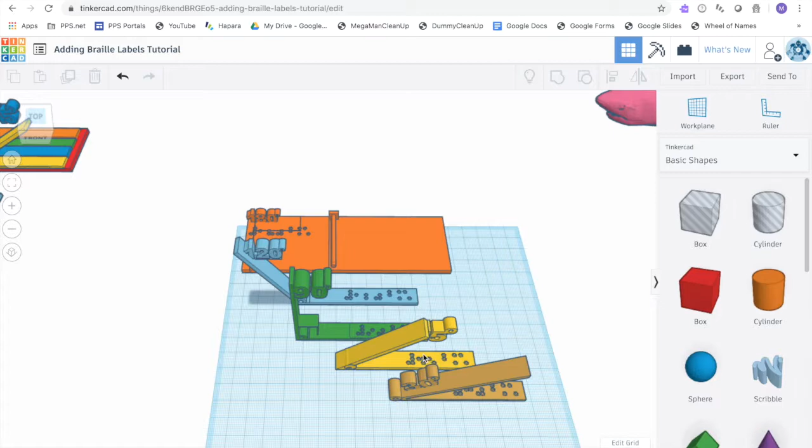So now that we're finished placing the Braille labels on this model, let's take a look at something a little more complicated. I'm going to grab all of these models and just drag them off to the side. And I've prepared this shark model with some Braille labels.

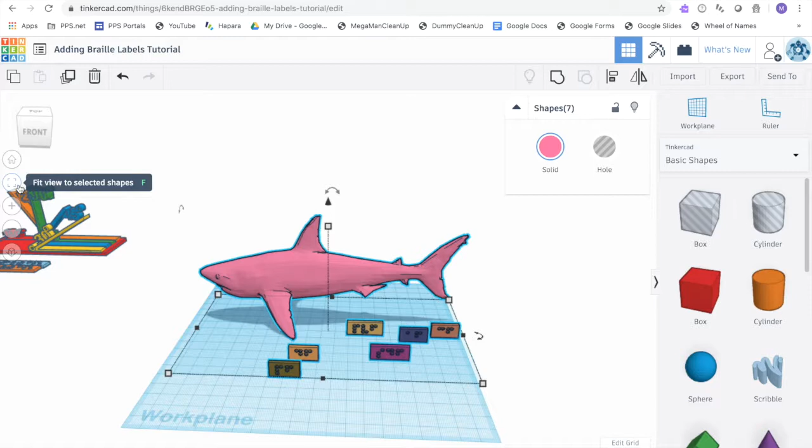You may have noticed that I used this kind of square tool over here. Fit view to selected shape is very helpful. If you have a single shape selected, you can quickly jump in to look at that shape closely, and it helps when you're editing.

Jumping back out, you can see that I have a shark model here, and I have a series of Braille labels. These are 2 and 3 character labels. The Braille takes up a lot of space on the model, so instead of using an entire spelled out word here, we're going to have to abbreviate everything.

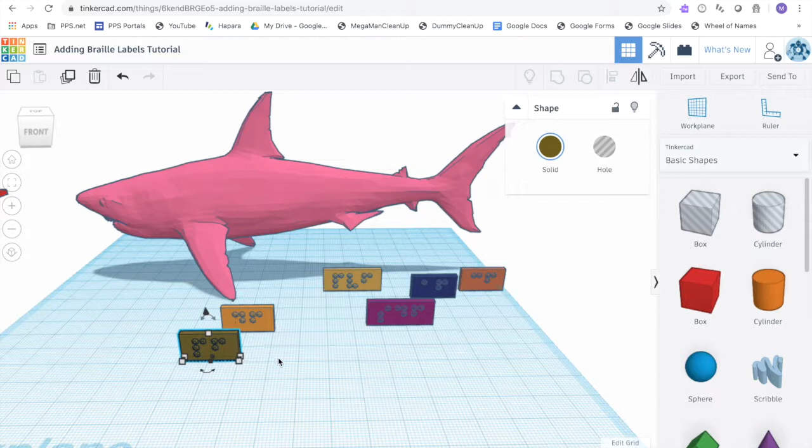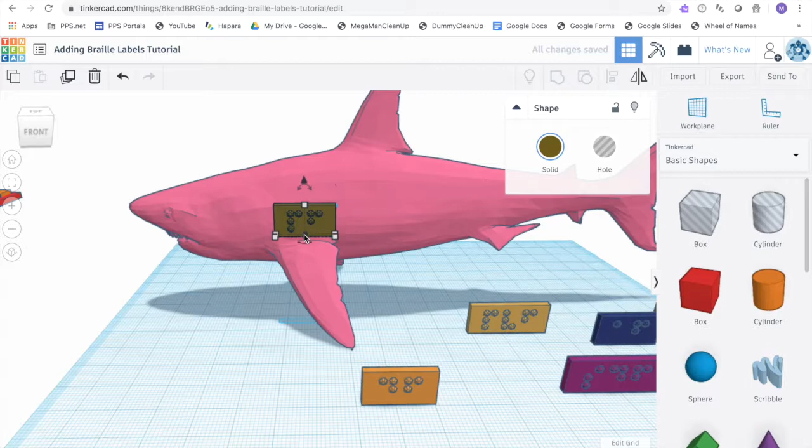So, placing these, I'm just going to try and eyeball this. This model isn't flat like the last models we were working on, so I'm not going to try and hide these surfaces, these kind of plates that the labels are on. I'm going to leave those in and have that be a nice boundary to help identify the Braille label and hopefully make it more readable.

So I've just placed it on the side there. You can see I'm leaving the plate intact. I want to move it in just a little bit more, so here I'm going to edit the snap grid.

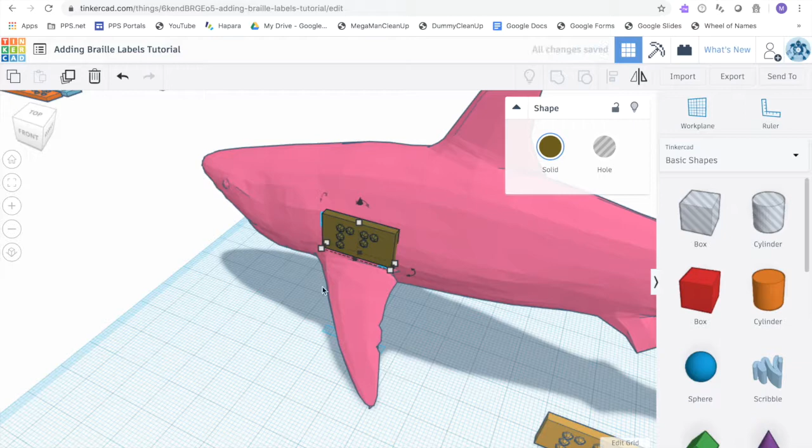And I just like to use the arrow keys. I don't want any of that pink to show through, but just enough that that label is kind of in there nicely, and it won't be hanging off too much.

Okay, and I'm just going to repeat this process with some of the other fins here. So I'm just dragging this over. I'm going to raise it up. It's not showing quite as much as I want.

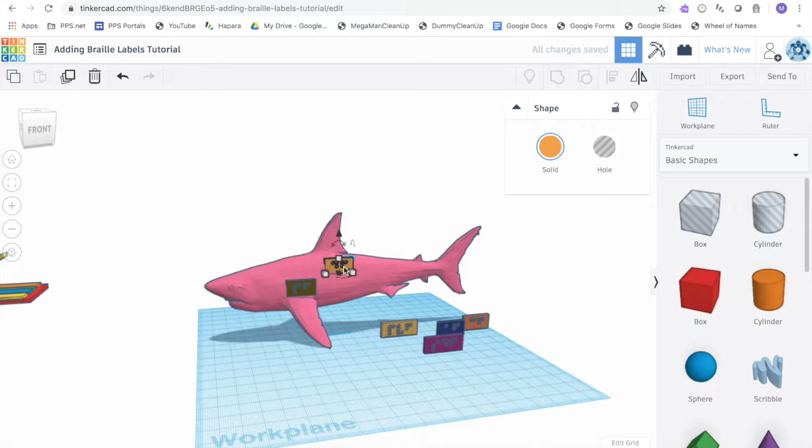Here I've set the snap grid at quite a small increment, but I didn't want to have to press the arrow key a whole bunch of times. So if you hold the shift key, it will move by that increment in a multiple of 10. So I don't want to have to press over and over again to move that. I can go ahead and hold the shift key.

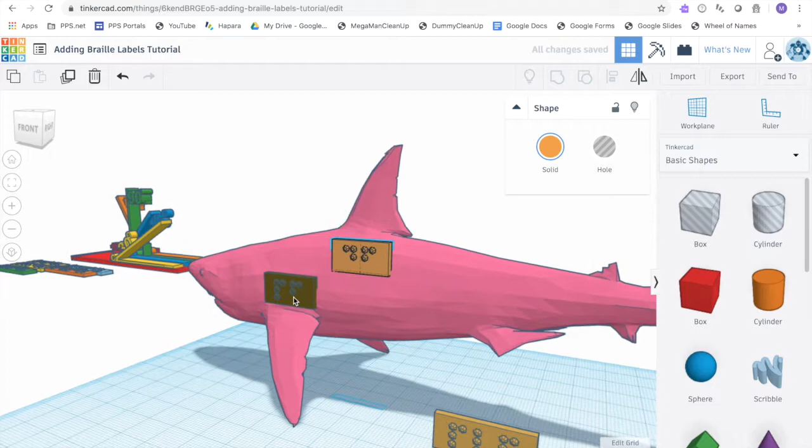Okay, that's an okay placement with that. I might actually rotate this a little bit. And if I pull it outside the circle, I get to more finely tune the rotation. I'm just kind of eyeballing this.

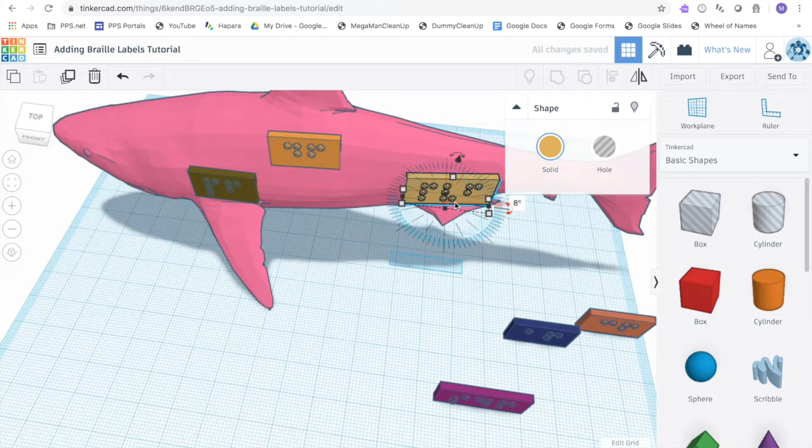Another option would be to use the workplane tool to really line this up. But in my mind right now, it seems easier to just look at this and drag the labels on that way.

So I'm keeping the label just adjacent to what they're labeling, as I don't want to obscure the item I'm labeling. Okay, looking at this one, this might actually be difficult to read because this fin sticks out here.

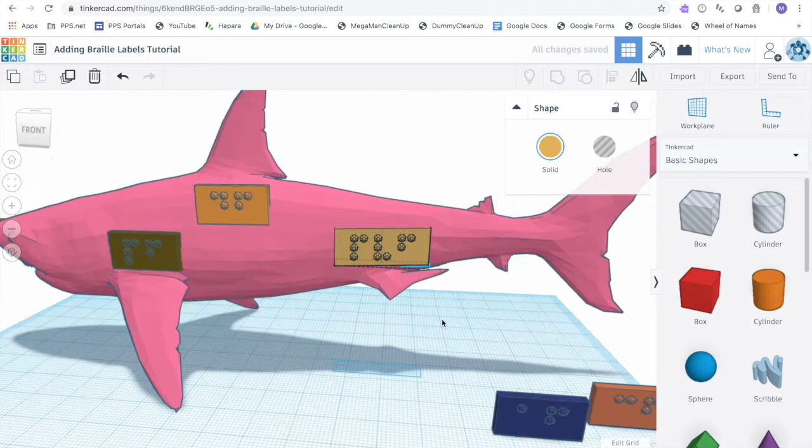I'm going to nudge that over. And you can see the pink through it, so I'm going to have to pull that back out a bit. That looks like it might work a little better.

This second dorsal fin labeling the top one here, I might put that along the top. And I'm going to go ahead and rotate this so that it's lying flat. I think that might help distinguish it from the other labels a little better.

So I did 90 there and I did not rotate the right way, so I'm going to do -90. I'm going to put this along the top here.

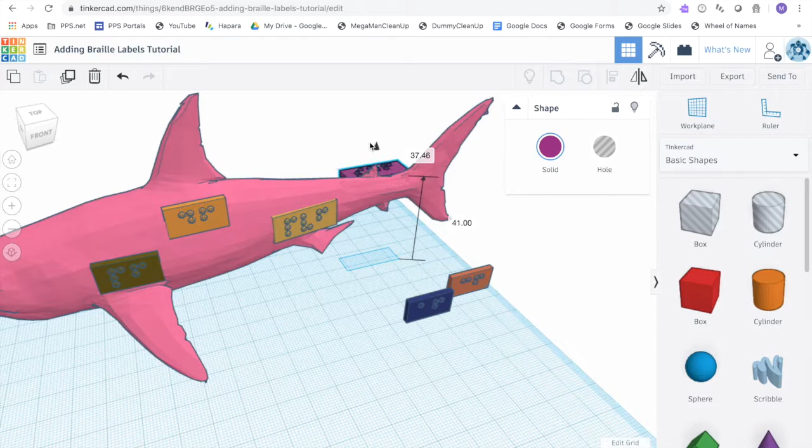Okay. It's important I don't have any pink showing through parts of this because that will affect the Braille. It could be interpreted as a part of the Braille, or at a minimum be distracting from the Braille label. I want to keep that area clear.

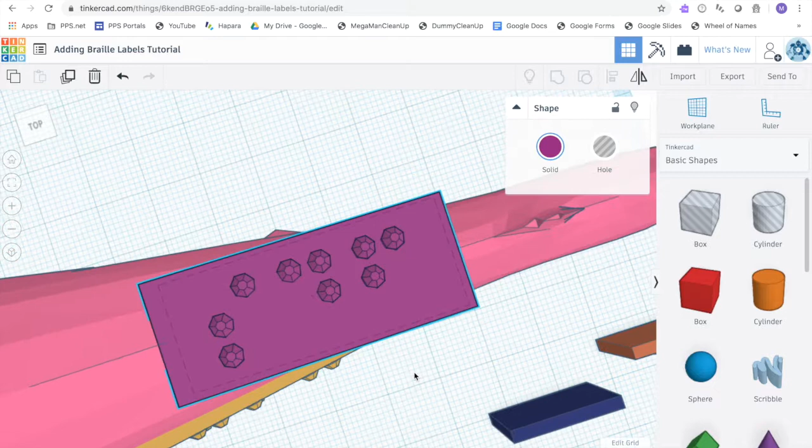So this is kind of hanging off a bit, but I think that's going to be okay. We're using this plate as a distinguisher for those Braille labels, so I don't think it'll be interpreted as part of the animal.

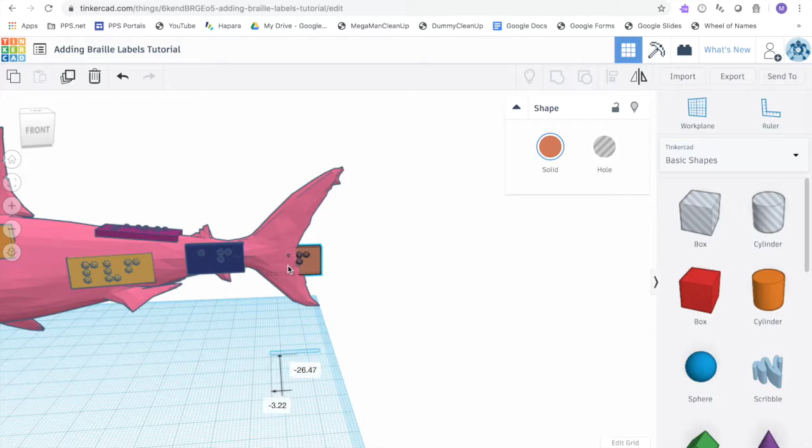So even though I have rotated one of the labels, I don't want to change the orientation of the Braille, really. All of these Braille labels are still facing the same direction.

What I don't want to do is start to spin the Braille labels this way, where this label might fit a little better going 90 degrees on this fin here, but that's going to be confusing for the reader.

Especially as they're going through along the model and feeling all the other labels in the same orientation, having one spun at a different degree like that is not going to be easy to interpret.

The initial expectation will be that this is Braille, oriented in the same fashion. They may misread the characters.

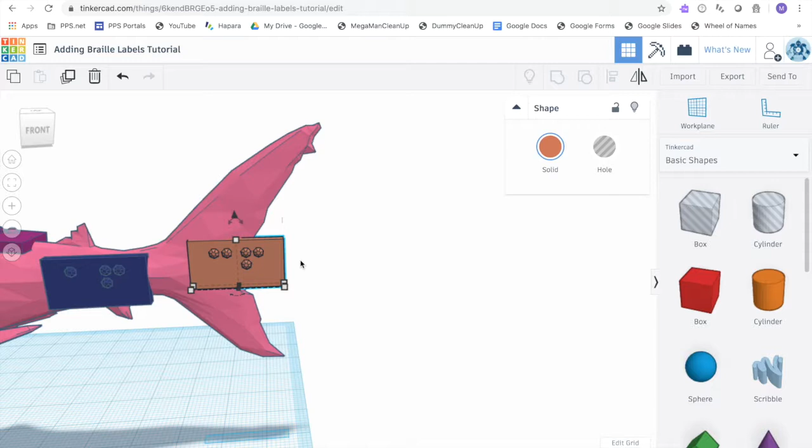So I'm going to leave that one sticking out off the edge there, and again I'm using that square plate as a boundary and as a reminder that this is just a label.

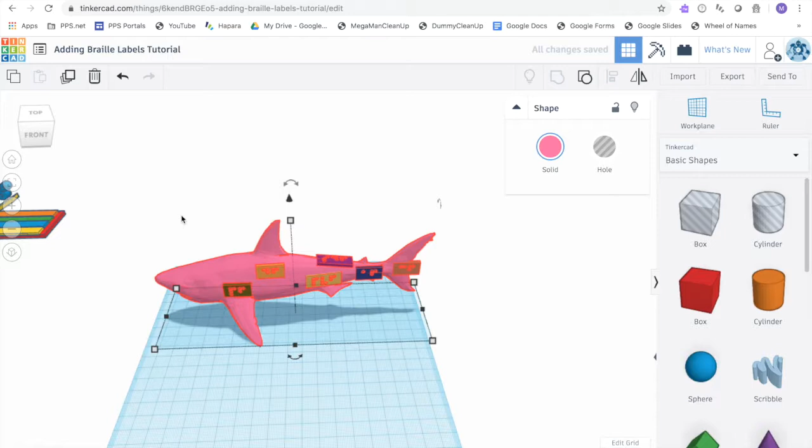So now that I have all my labels placed, I'm just going to select everything in this model, use Command G to group them all, Control G if you're using Windows, and there's my shark model with the labels.